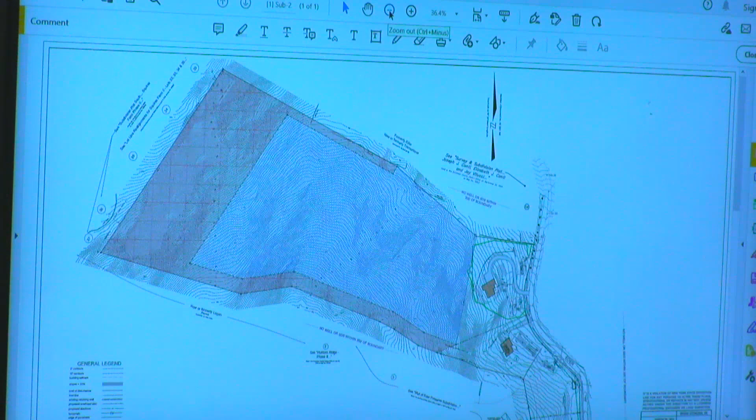That's pretty good, right? Brian Stacosta, Dane Stacosta Engineering, here tonight for the 3-lot subdivision for Mr. Bridges. This project's been in front of the board an awful lot. I think we're getting a little bit closer to where we're all comfortable.

The plan updates we made were specific to our last meeting, revising the SWPPP that we provided, taking that rear lot, lot number 1, off the table for development. So we go from a 4-lot subdivision down to a 3-lot subdivision. There were a lot of drainage issues related to that rear lot, and we advised the applicant that it's not a wise move right now to even consider any kind of development back there. So we took that off the table and revised the SWPPP.

Since then, we've had a constructive meeting with the town consultants about buffering lot 1, that rear hillside. We kept the intent of having a permanent restrictive easement around the property, specifically toward the west, which incorporates steep slopes, and then buffers north and south along the property line. The consultants expressed concern about potential future cutting of the area in blue.

In talking to the applicant, from an economic standpoint and a development standpoint, he was happy with identifying the area and putting restrictive notes on the plan specific to that area—if he wants to do any clearing or land disturbance, he or anybody else who owns that property would have to come back in front of the board and go through the permitting process. He was uncomfortable placing that entire area under a conservation easement where nothing can happen other than passive recreation. So I thought that was a fair compromise, since we don't have development on the table.

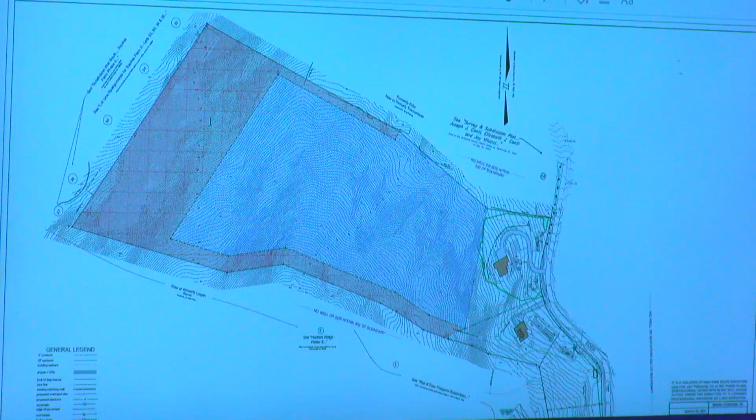Okay, are there any other questions by board members or town professionals? Are there any members of the public that are here to speak in favor of or in opposition to the project? I'm not in favor of or opposed, I'm just looking for clarity.

My name is Rick Martin, 198 Devon Farms Road, or as it's shown here, Lot 37. So I just want to understand, it looks to me like where he butts my property at 37 and going down the hill, that red buffer will be the woods behind all the homes on Devon Farms? Okay, I'm fine with that.

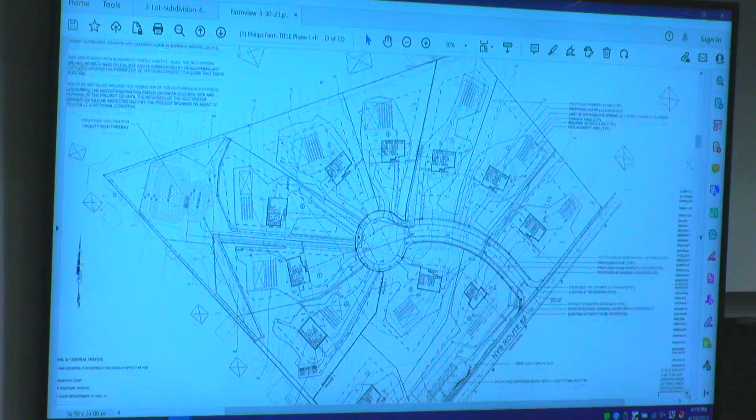Brian Stacosta, Dane Stacosta Engineering, for Farm View Estates. To give you an update on what we've done on the plan since we met, we've updated our SWPPP to include our stormwater redesign. The design in the back of the property now mimics the front of the property, an infiltration basin taking advantage of the gravelly soils on site. It appears that when we made the submission, the hard copy made it to the town, but the digital copy of the SWPPP report wasn't uploaded with the link we sent, so there was an issue. It's my understanding the town engineer hasn't had a chance to review that SWPPP yet, but we're looking forward to working with the town engineer on that updated report.

There was also a conversation with the town consultants regarding irregularly shaped lots. If you read the town code, anytime you propose a lot line at either a new town road or street, they should be at a 90-degree angle. The lot lines we show on this plan have that 90-degree angle, and we can provide further dimensioning to bolster that requirement.

The one portion we discussed last time was the 10-foot leg that came down from lot number 6. As discussed, the adjacent homeowners we've been working with—one would like to purchase lot 6, which has a majority of the rear stormwater on it. He and his neighbors were looking for an avenue to keep a buffer between lots 11, 8, and 7. Can you indicate them on the map for us?

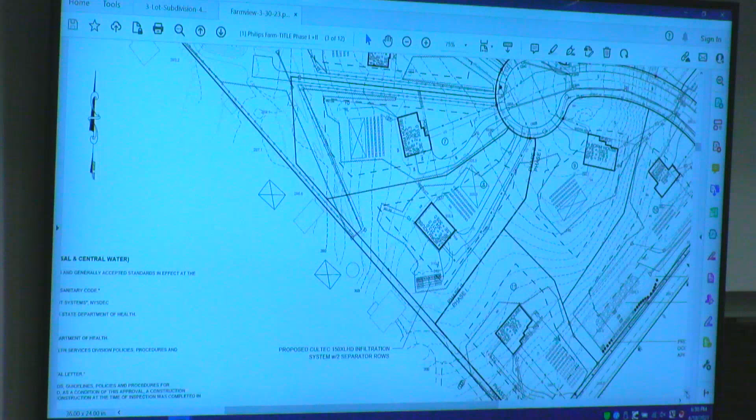The access roads to the infiltration basins, are those paved? Scott, do you want those paved, or do you want them like a hardened surface? Hard surface, hardened surface. So it would probably be like a piece of geotech and some gravel on top, compacted.

Got it. Other questions? Brian, you mentioned between lots 6 and 7, you're going to have the split rail fence on either side of the right-of-way. Who maintains those fences? Does that become the town's responsibility, or is it the property owner's responsibility?

Well, they're going to be inside a drainage easement area. The applicant's going to have to put them up as part of road dedication, and I would assume maintenance responsibility would go to the district that would be created, Scott? That's what I'm thinking, it'd be a drainage district formed here. So each individual taxpayer would pay a certain assessment to maintain whatever drainage we're proposing in that little community. They will take care of maintenance.

Other questions or comments? Are there any members of the public here to speak in favor of or in opposition to the project? Come ahead, and if you would, please tell us your name and sign in up here at the podium. Thank you.

My name is Andreas Seifert. We're the neighbors, over there for 81 years. I just had a question about lot number 6 and that infiltration system, to Brian.

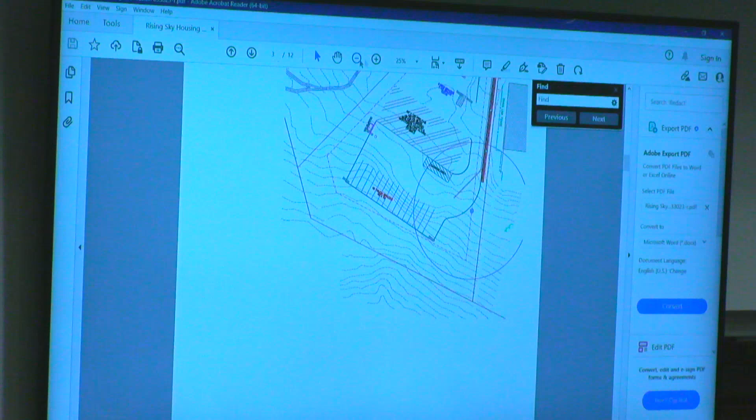Okay, Joseph Berger, Berger Engineering for the applicant. We're proposing a 9,000 square foot contractor's yard on about a 2-acre parcel. We'll have subsurface sewage disposal. 9,000 square feet on about 2 acres.

We're going to have a subsurface sewage disposal system for the sewage, and an individual well for our water. The parking for the trucks will be in the rear, and the entrance will be in the front, where the employees will park. It's basically just for the placement and storage of the contractor's vehicles, with a small internal office so they can do their paperwork. This will not be for customers to come by, it's just a place for the trucks to go during the evening. We'll take them out during the day to do their work.

Could you describe again the fencing and landscaping that separates your building from the next door child care center? So, the site is next door to the daycare center.

What we're proposing to do is put a berm up in the front portion, closer to the cul-de-sac. There's going to be a retaining wall because we're going to be slightly higher, and then a fence on top for screening, for the first couple hundred feet. From the building back, there'll be a series of trees, and our parking lot in the rear will be cut down into the earth, so there'll be a natural earth berm between the parking lot and the view of the neighbor.

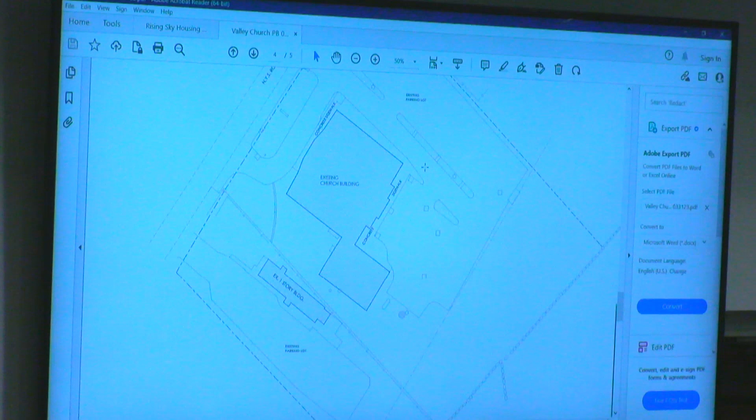We've received a letter from Christian Moore with a list of things we need to address, like grading, soil, and erosion. We wanted to at least get before the board to see if they had any comments. We know what we have to do as far as the civil drawings, and we've engaged a civil engineer to address those things. This is just preliminary - we want feedback from the board to make sure we're headed in the right direction.

Is there a height difference between the two existing lots you're connecting? Is there a slope, like grade? Yeah, there is.

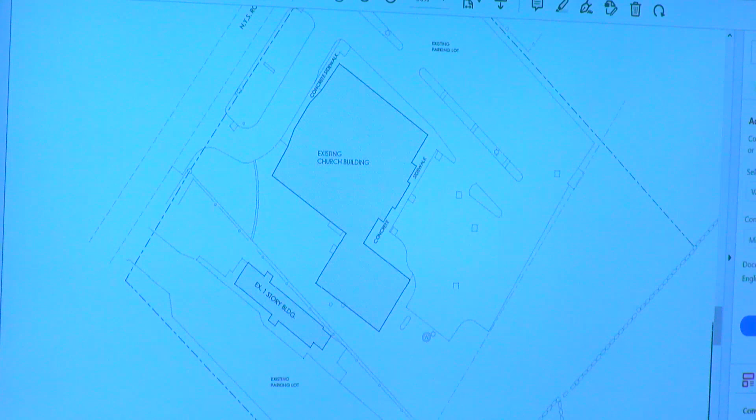I'll bring pictures for the next planning board meeting. Can you guys see the cursor? This lot over here is a bit higher, a few feet higher, than over here where we're going to be grading. So stormwater is going to be an issue - we'll have to regrade in that area.

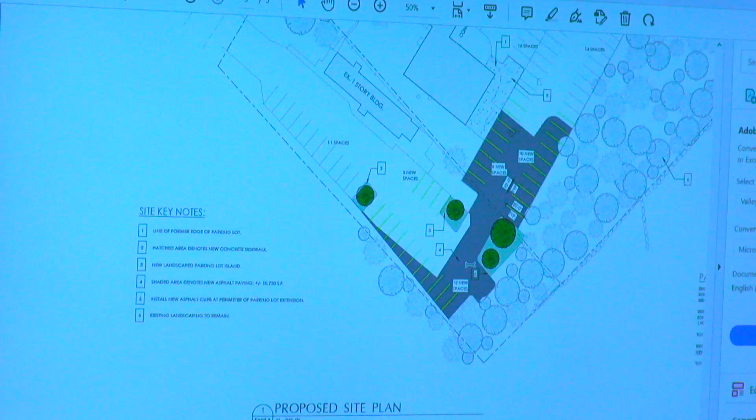Are you trying to change any of the ingress or egress points with the connection, or just connecting the two? Just connecting the two - anything in gray on this site plan is just going to be new asphalt paving. The unshattered lot actually stops short of how far back the property goes, so we're trying to make it bigger for overflow parking. That's actually going to help with the ingress and egress.

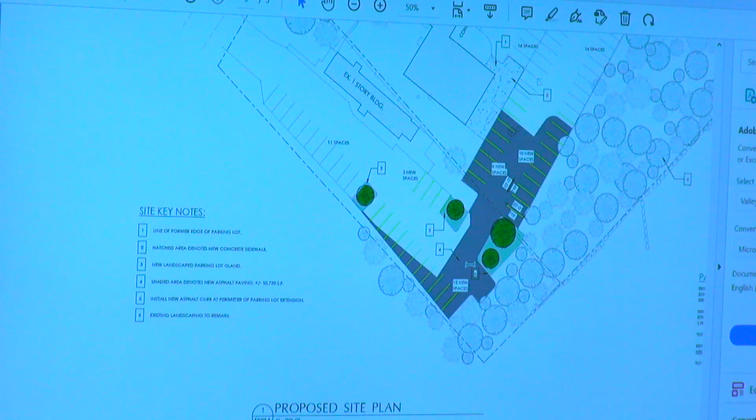Right now the church uses the unshattered lot, but the main lot for the church - in later phases we want to address this, because right now that's a two-way, one way in one way out. But this right here, right in front of the church, is only one way. We're hoping that by joining the two lots and creating this, it's going to create a much better flow.

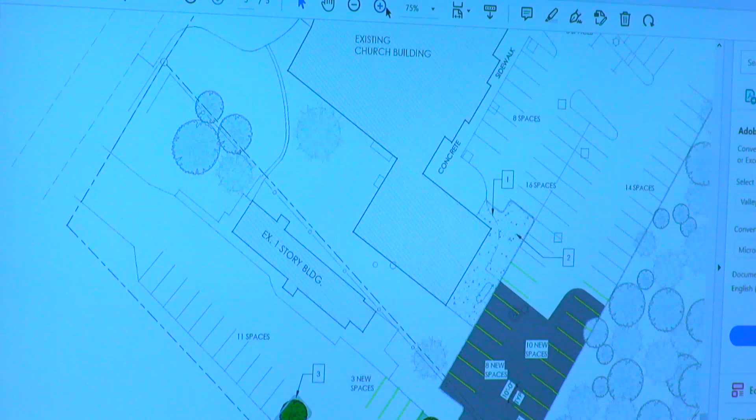How many parking spaces will you end up with then? According to this, 145. It says you're going to expand the parking areas on the lots by 30 spaces for a total of 145 spaces, according to this resolution. Yep, there we go. So there's 115 right now, adding 30, going up to 145.

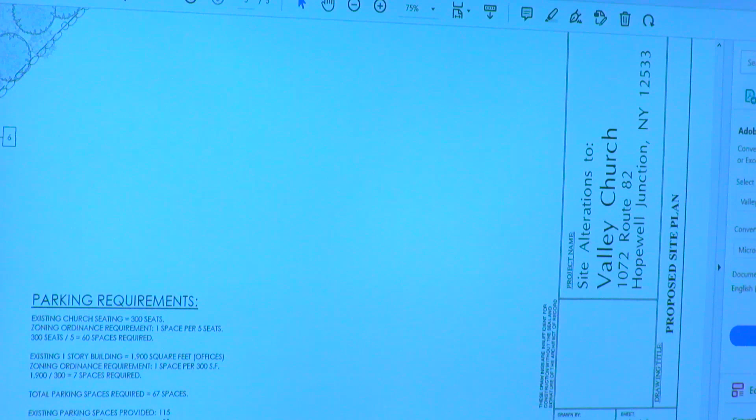Do you attribute it to growth in your congregation? Is that the game plan? We're definitely growing a lot. In fact, this past Sunday was our highest between online and in-person attendance - over 1,300 people. We're definitely growing, which is a great problem to have, but parking is our first gate we have to get past. It's spread out over three services though, so it's not 1,300 people showing up at once - that would be a much bigger problem.

But just for now, we wanted to get the okay to move forward with that, so we could get a site engineer involved. What will become of the building that Unshattered is moving out of? We're going to make offices there.

So will they be used during the week, on Sundays? Will that parking be designated for that as well? Yeah, during the week, people will be parking in there. We have about 12 people on staff, so some will be parked at the church building and some at the old boutique building.

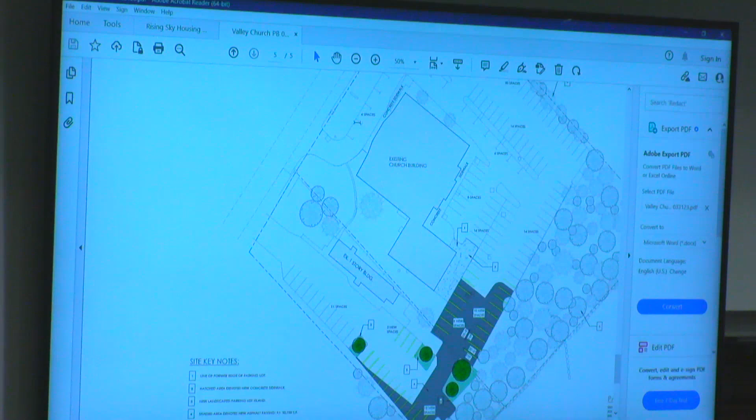We would appreciate that greatly because we just can't get in there with cars in there. It's almost impossible to get a fire engine in. I remember you now, I've been there for the alarms. No, that's a very good point.

I mean, we could also look into maybe downsizing that island that's out there as well. I know the signage is out there. Like, if we could maybe blend the two of them together, we still have the handicap, but we also have like a fire zone, a no parking area.

But we'll look, when we engage the civil engineer, we'll bring that to his attention. The problem is with our ladder truck, it's not just the width of the truck. If we set it up in there, we've got another 5 feet on each side for the outriggers that have to be set up. It would take up that whole space.

I think what we'll also do is we'll show some of the turning radii here for some of the apparatus. Okay, thank you.

So you said this was the first part of your expansion plan. What comes after this? What's your long-term plan? I know you said something about this helping with entrances and exits because this is part of a bigger plan.

We are investigating buying the back half of the veterinarian's property. We spoke to them, they were open to it, but they're dealing with some health issues, so we're letting them sort that out. It would be just land for parking, and it's kind of landlocked, so it really can't be used for anything except if they want to expand their dog area.

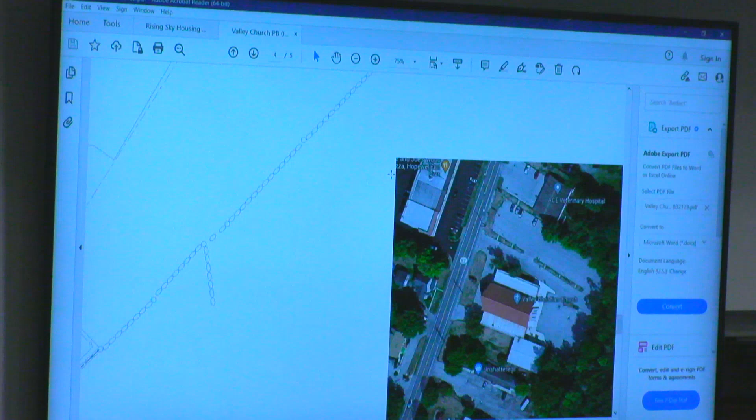What we shared with them is, say they have a fencing yard for their animals that's maybe from here to there, we could go 10 feet past that spot and then buy the back half of their acreage, which is about half an acre, and make that another parking spot for maybe 20 more spaces.

They could use that as well all week, because we let them use our parking all week, and they let us use their parking on Sundays. So they were open to that. That would be another addition to this parking improvement plan.

In that one, we were thinking about possibly making one way in front of the church there, and then a one-way out going on that longer strip of parking, the west or east side, working with the highway department to see if there's a better way to have traffic flow. But we're not even close to that yet.

This is phase one. We have enough between making the offices and this work. And that's going to be reviewed by the New York State DOT, not the highway department. That's right, whoever's required at that point.

Just a statement, they're going to be taking the two lots and combining them into one. So now you're going to have one parcel with three access points onto 82. That may be something that is considered by DOT, but they are existing. This is just a sketch right now.

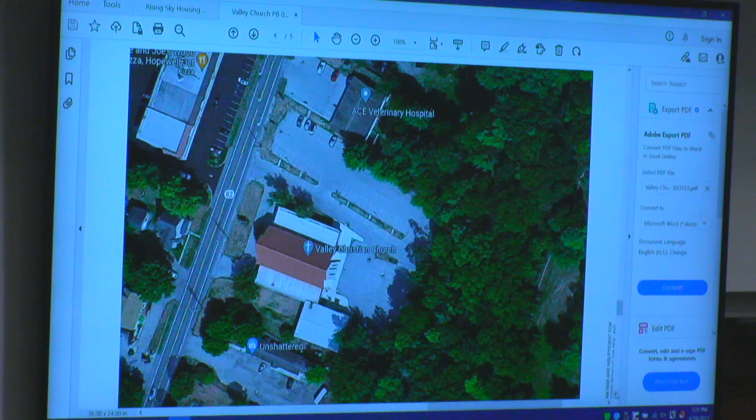But the septic is all in front. So if you see, unshattered is totally in front, and that little secondary building off the church, everything's in front of that. So there's no septic or leach or anything that goes behind those buildings or encroaches anywhere. Okay, because the survey I saw for Lot C, the south lot, did show indicate a tank behind.

There is a propane tank there, yeah, in the ground. It didn't say what kind of tank it was. I didn't know if it was a septic tank or a propane tank. Yeah, it's that propane tank.

I got with George from Crown, and we came up with a plan that we'll also incorporate into our site plan for you guys to review, on moving the 1,000-gallon tank out and putting two 500-gallon tanks in behind the unshattered building, away from the playground areas. So we do have a plan to move that tank and relocate it so that it's not anywhere it shouldn't be.

The fire commissioner has a question. I'm glad you're growing. Just as you continue in this progression, keep in mind I want to make sure that the amount of parking you have doesn't outpace the safe capacity of the building itself. Just keep that in mind as you continue to grow. Right, appreciate that.

Okay, any other questions or comments? I think based on your response to some of the issues that came up tonight and some of the things you already have in the works, I'd say we're favorably disposed to the project. Look forward to seeing the next iteration and go from there.